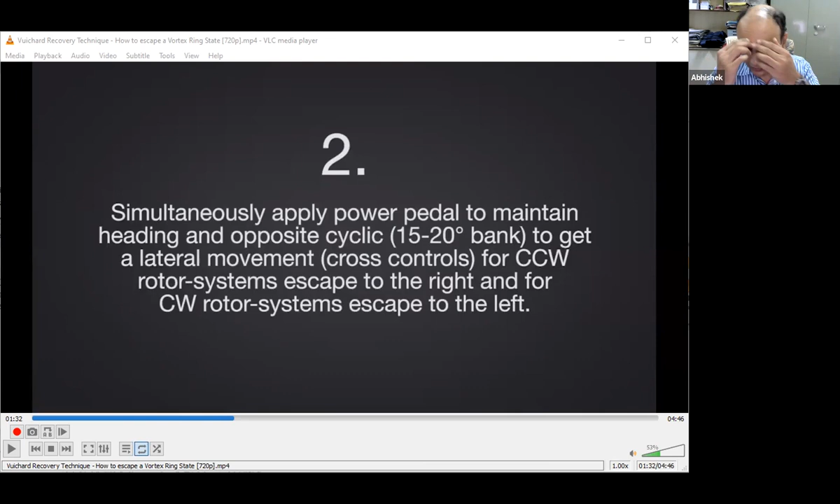So I had a $100 quad rotor long back, which did not have any sophisticated autopilot. It simply had a basic attitude controller, so you are practically flying it manually. In that case, its RPM controller was not very good.

So you would give a small throttle reduction to bring it down. It will start to come down very fast. A few times I would find it to enter vortex ring state. So what happens? When you enter vortex ring state, your vehicle will start descending very fast.

If you start descending too fast, what is going to be the panic action on your part? What will you try to do? Thrust up. Right, so you'll try to increase the thrust.

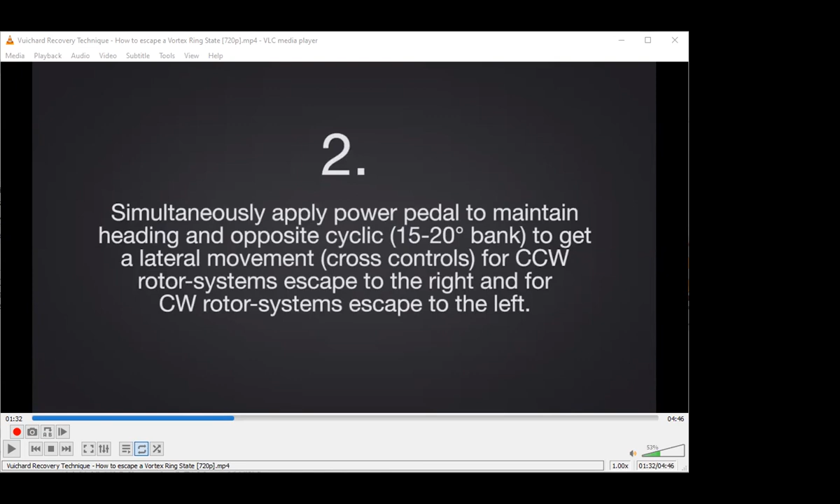Yes, sir. So you'll try to put more power into it. But more power actually makes the situation worse. Because what happens is more power means it will spin at higher RPM. If it's spinning at higher RPM, its downforce is increasing, so your vortex ring state will become worse, and it will not help you much.

So what is recommended is that instead of trying to give more power, you try to go forward or backward or sideways. So I'll try to give some forward pitch angle, so that you start moving forward, and you will see that you will recover control immediately. It will come out of vortex ring state very quickly.

So now, because of this whole business that you are trying to come out of this condition by applying more power, helicopter pilots used to refer to this particular condition as settling with power. Okay, so that's a very common name.

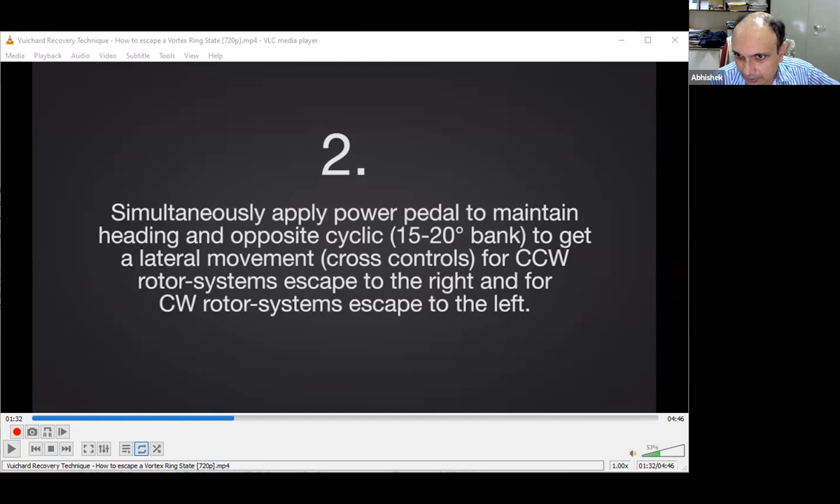So I'll play another video where they mention exactly the same thing. I don't think it's really very useful, but here they use the term settling with power in helicopters. Yes, so this guy tries to explain something, so it's not very relevant.

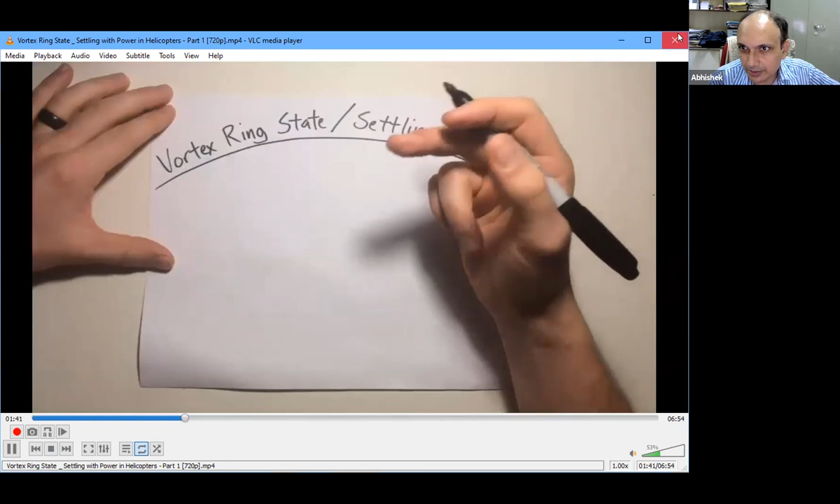Okay, so let's go back to my lecture slides. Let me share it again. So that's why they used to call it settling with power. And the way to come out of this vortex ring state is by maneuvering the helicopter in any other direction, either forward, backward, sideward, something which will help you come out of vortex ring state.

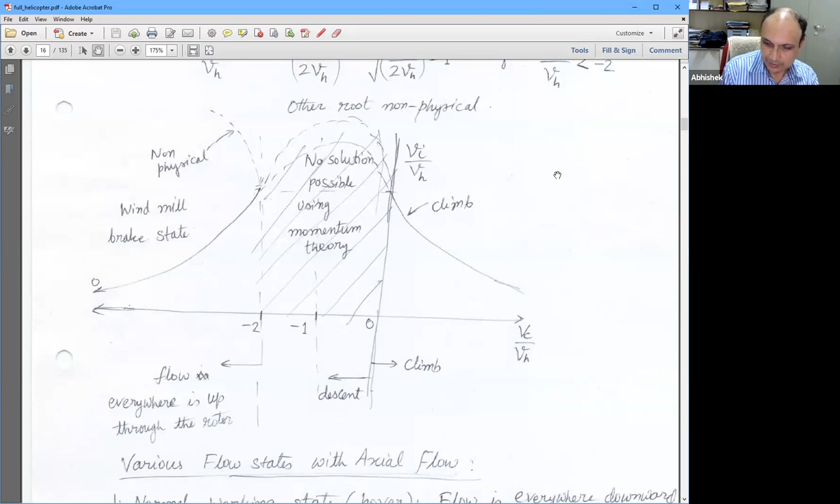So now let us look at this more formally. What are the different working states of a helicopter rotor? So, various flow states with axial flow. One is, of course, the normal working state, which is hover. Flow is downward everywhere. The second situation is vortex ring state.

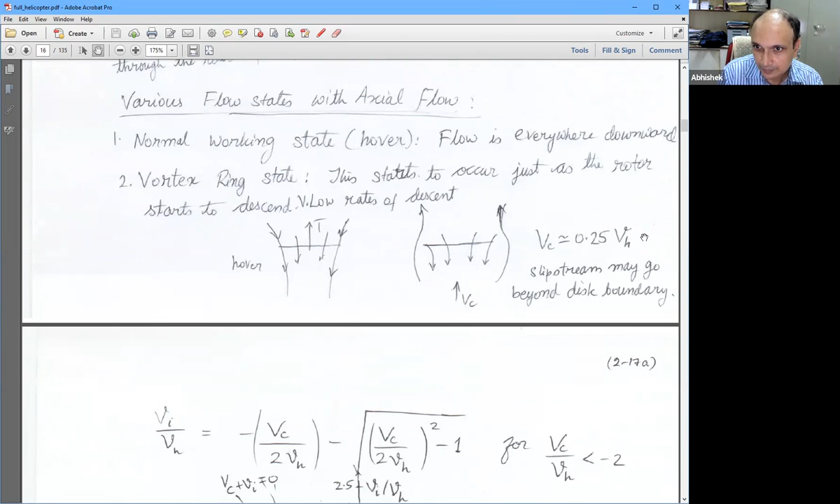It occurs as the rotor starts to descend at low rates of descent. The typical order where you start experiencing vortex ring state is when you are at around quarter of hover induced velocity. In this case, the flow becomes such that the wake will actually go beyond the rotor disc. So you have this kind of bulge because there is a ring of vortex sitting here. So the flow may be somewhere upwards, somewhere downwards, and so on.

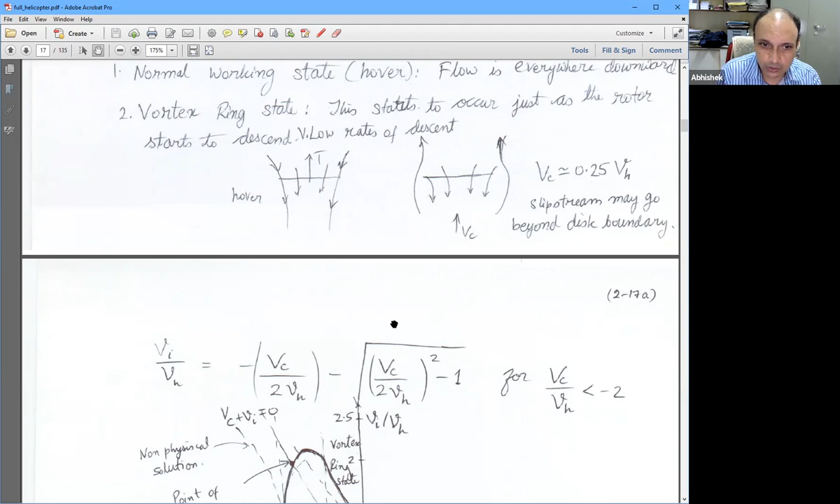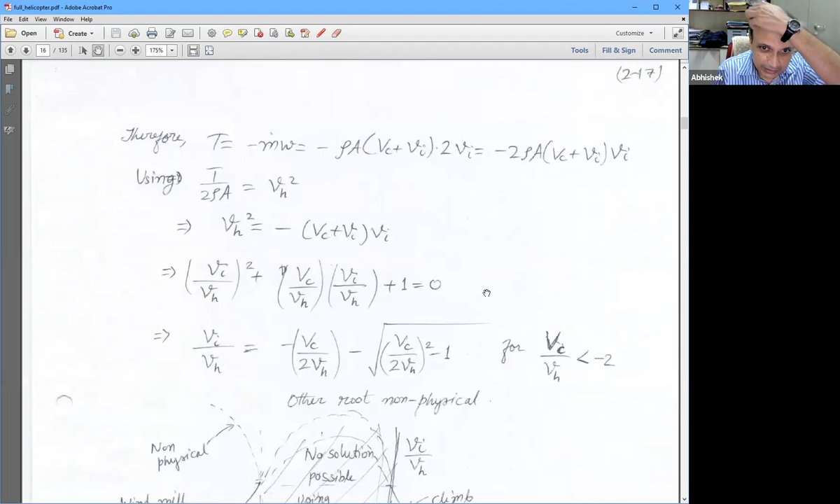Okay, but before we go with details of this, sorry, I forgot to cover one more part. That is, after we get this relationship, we also write the expression for power, which I have not done earlier here. So that actually is to be done. Let us first quickly discuss this part.

So this is the same graph which we saw earlier, that is induced velocity for normal working state, where you are climbing and hovering. Other is for the windmill brake state, when you are descending very fast and the flow is completely upwards. And in between there are other things like vortex ring state, turbulent wake state, and so on, where momentum theory is not valid from 0 to -2.

So same way, I can draw another graph, which is the power graph. Power on one side was going asymptotically towards this line. Other side also, similarly, it will come down asymptotically towards the same line. Here is the windmill brake state. Only difference is that here the power was positive, here the power is negative. So the power actually is in the third quadrant.

This is first quadrant, everything is positive, my climb is positive, power is positive. Other side, when I go to very high descent rates, my descent is very fast and I end up generating power, calling it the windmill brake state. And in between there is power, but we don't know how to calculate that using momentum theory. It has been connected by using some empirical observations. And also in between, there is a point where a crossover happens.

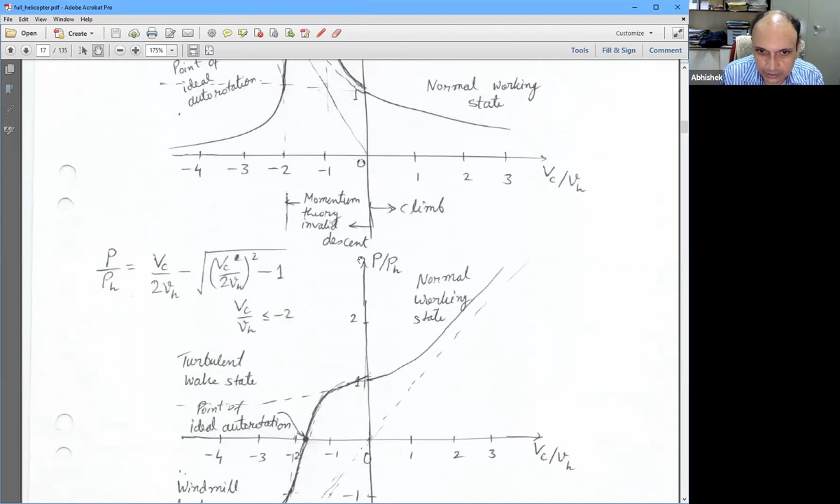So moving on to the power graph, here this becomes more obvious. So you can draw these two lines, power by hover power on the y-axis, climb by induced velocity for hover on the x-axis. Draw this 45 degree line, and then from 1 it goes asymptotic towards that, and here also from -1 it will go asymptotically towards this dashed line.

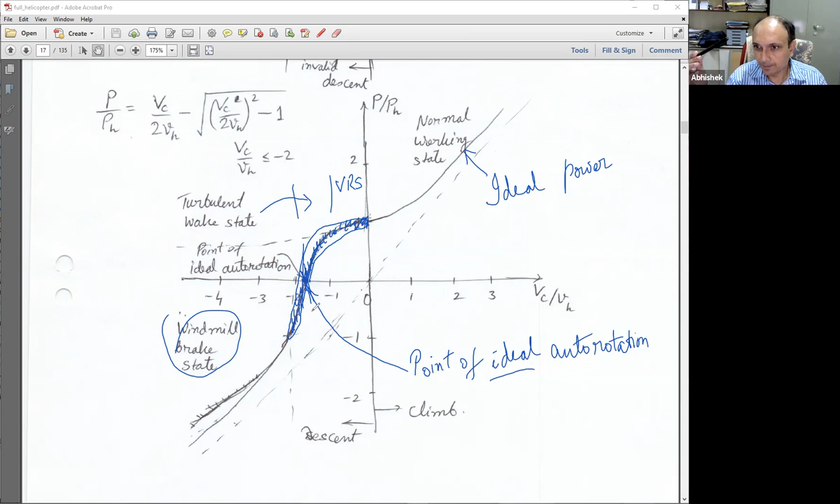So the helicopter starts to descend, right? It's descending, and when it's descending, it's basically losing potential energy. And if I don't do anything, it will gain kinetic energy, right? You drop a stone, its speed increases, right? So like that, the helicopter is dropping, its velocity is going to increase, and as a result, the airflow through the rotor will also increase. So that's how this whole autorotation business works. I will explain it in more detail, but I think that is fine for now.

All right, so we are done with this graph. So this is a point of autorotation where the power required by the rotor is zero.

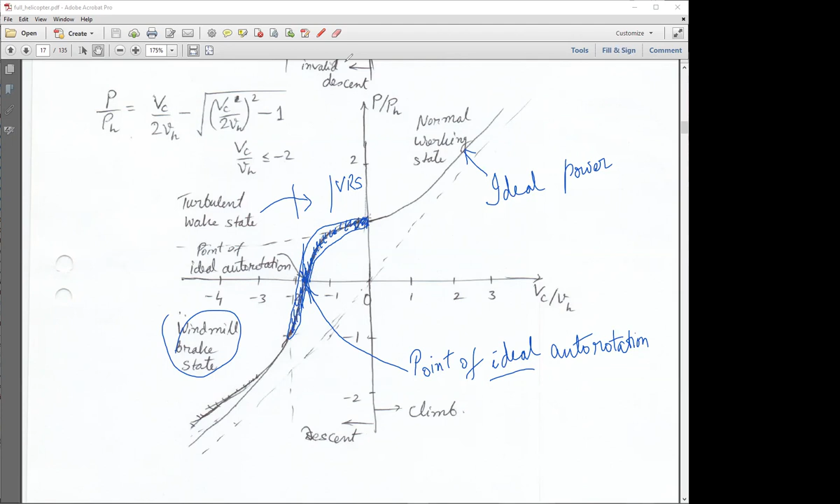Sir, what is turbulent wake state in this? Turbulent wake state is similar to vortex ring state. I'm coming to that in a moment.

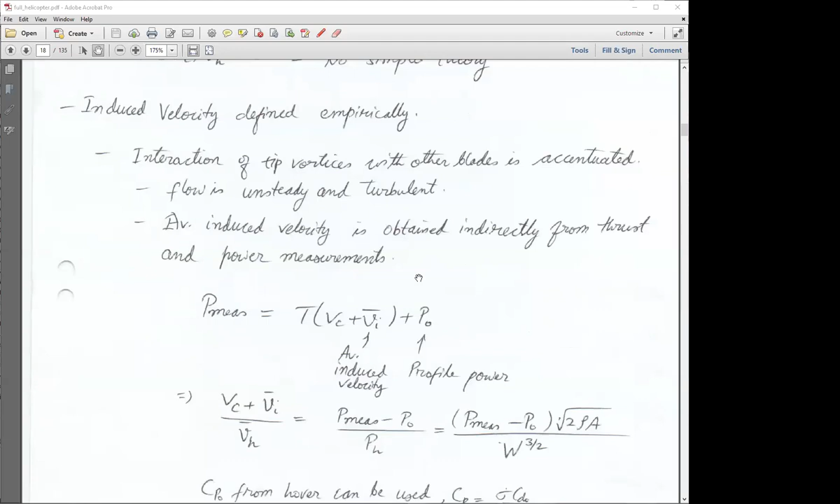All right, so now let us look at these things one by one. Okay, I'll come to this autorotation business and the formula for that later. Okay, first let us look at this here. All right, sorry, one minute, I will call.

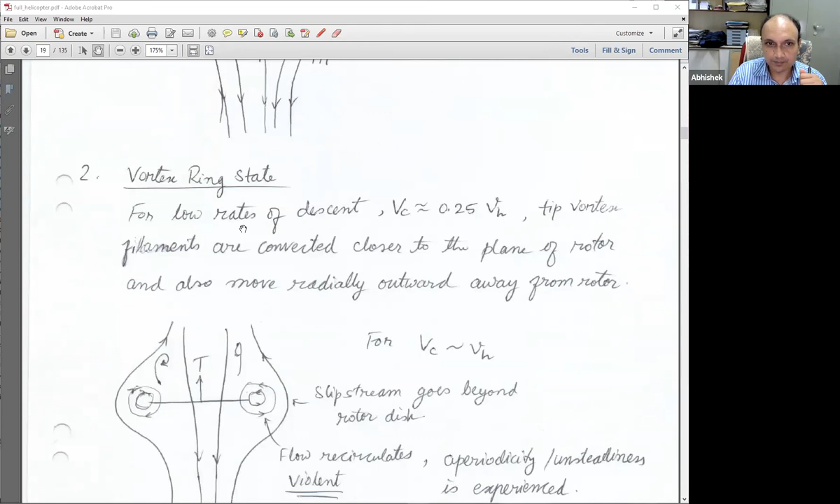All right, so first was what we are talking about - the normal working state. The flow is nice, downwards everywhere, your boundary is well defined. Next state is this vortex ring state. So for normal working state, you can draw this diagram. So write down normal working state in your notes. I forget that you have to take notes also.

So draw this diagram. Write down these four working states of the rotor in axial flight. Remember, this is for axial flight only. What is axial flight? Ascend and descend only. So your rotor, the flow through the rotor is only in one axis - it's parallel to the axis of the rotor, center of the rotor, always parallel to that. Okay, diagram done, normal working state over.

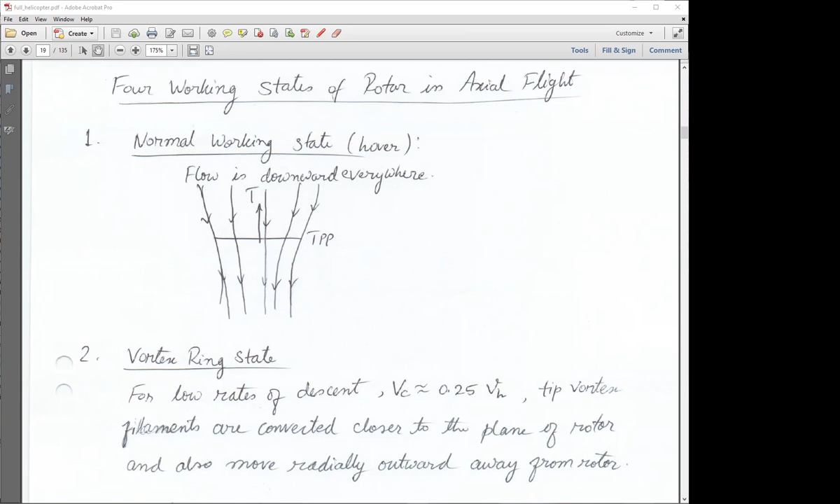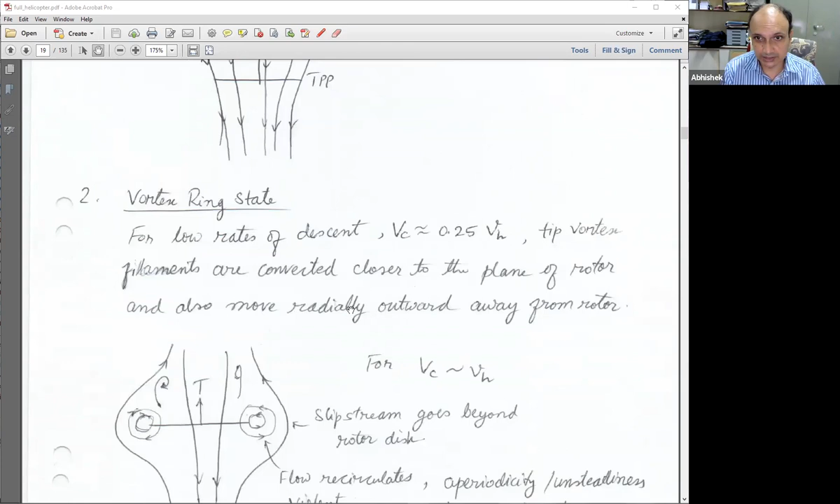So diagram is done, right? Yes, sir. Okay, so that is normal working state. Today is 19th, right? Now the question is, what is vortex ring state? So write down vortex ring state.

For low rate of descent, when descent velocity is of the order of 0.25 of VH, a quarter of VH. So if my VH is say 10 meters per second and my helicopter is descending at 2.5 meters per second, in such scenarios, tip vortex filaments are convected close to the plane of the rotor.

You saw that huge vortex ring created behind the helicopter in that visualization. That kind of ring gets created because the air coming from down, due to my descent, is pushing the wake up. It's pushing it up and all the vortices which are being shed, the helix - if I squeeze the helix and bring it into one point, just imagine, like a spring, I press it, it becomes a coil, right?

So that ring forms around the rotor disc. It's convected close, pushed by the air close to the plane of the rotor, and also moves radially outwards away from the rotor. Because I am pushing it, it needs some space where it can park itself. Close to the rotor there is a lot of spinning air, so it will form an equilibrium point where, if this is my rotor, the ring will be somewhere outside that rotor area. So this ring will form and the flow field around it will bulge up like this, which we saw in the CFD simulation I showed you.

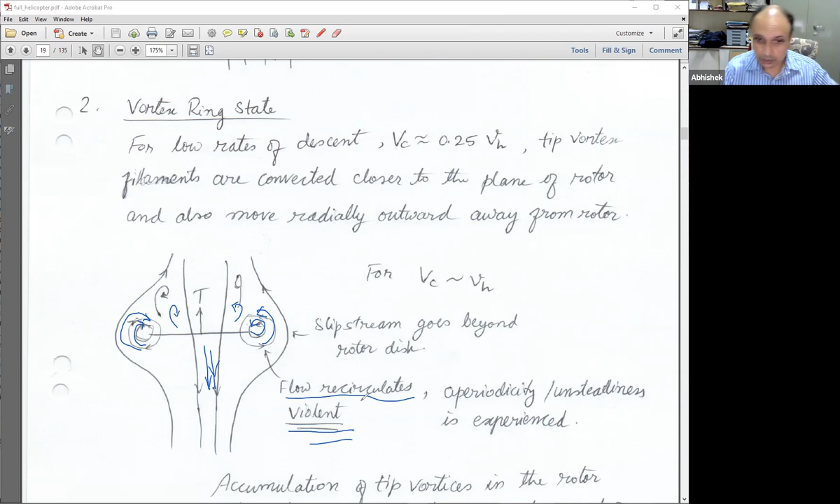So this accumulation of tip vortex in the rotor plane begins to resemble a concentric set of vortex rings.

So from a piloting point of view, this is very dangerous, and the rotor can lose lift as we saw. And that's why that case of the Ospreys - V22 Ospreys crashing. This guy starts descending too fast and somehow first rotor ends up losing thrust faster. And because it loses thrust so fast, now the other rotor is generating thrust. What will happen? No thrust here, lot of thrust here.

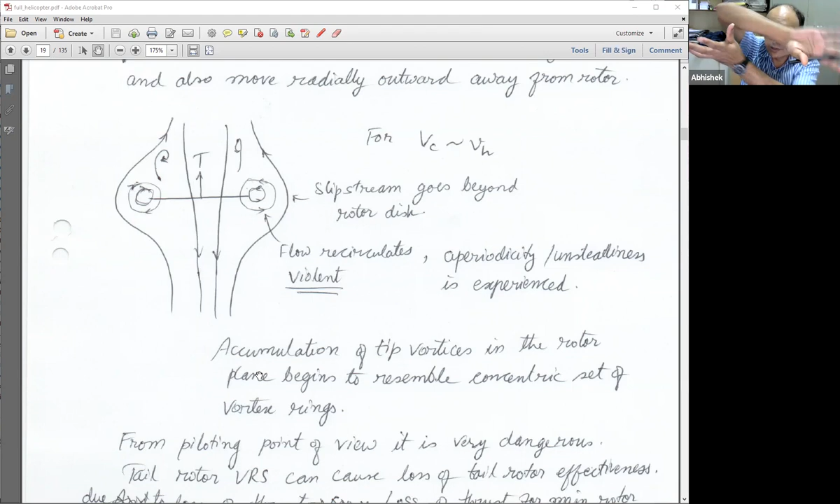Couple rotates, so you have a moment, and the whole thing is going to flip over. That's what you saw in that animation, that the whole helicopter, the Osprey, V22 Osprey, it flipped over, and after it has flipped over by 180 degrees, you cannot do anything. Crash in a matter of time.

So it's very dangerous, but all helicopter pilots are aware of this, so they normally never descend vertically. If they have to descend vertically, they will do it very, very slowly, at order of... here it is safe. I would not want to go over 0.1 VH, because if I go to 0.25 VH, for sure I'll have vortex ring state. That is one part of the challenge.

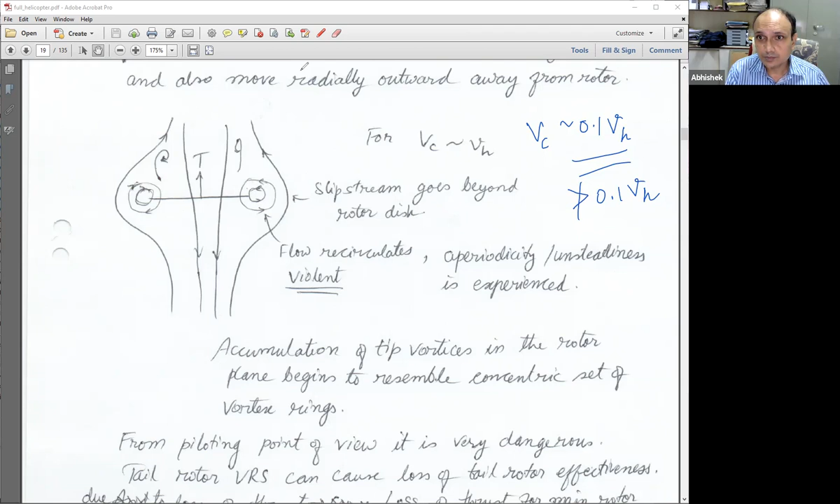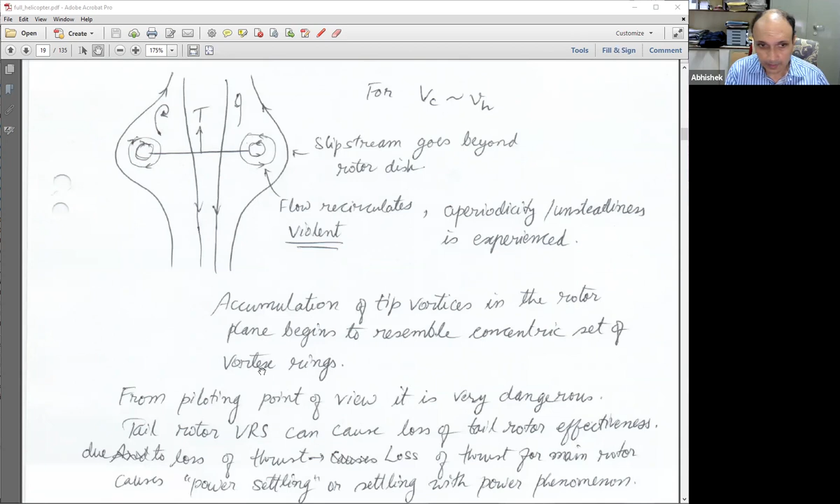So the accumulation of tip vortex happens and resembles this pattern. I hope you are noting down all these things. Yes, sir. So from the pilot's point of view, it is very dangerous, and also the same thing can happen to my tail rotor also.

So tail rotor vortex ring state can cause loss of tail rotor effectiveness due to loss of thrust of the tail rotor. Because, you have to tell me, explain to me - I already gave you one example where there is a scenario in which the tail rotor can enter vortex ring state. What was that?

Let me ask someone, I'll call out names. I don't want the same people answering all the time. Who are the participants, right? Yeah, okay. Aman, are you there? Aman? Yes, sir. Unmute. Yeah.

All right, so I talked about one scenario where the helicopter rotor can enter vortex ring state. Can you tell me about that scenario? Sir, when they were descending very fast - tail rotor. When is the tail rotor descending? What is the tail rotor? Which is behind the main rotor. Yeah, so at how - is it descending? How will it enter a descending condition?

I agree, the rotor has to experience descending condition. So the question is, how would tail rotor experience descending condition? What can happen?

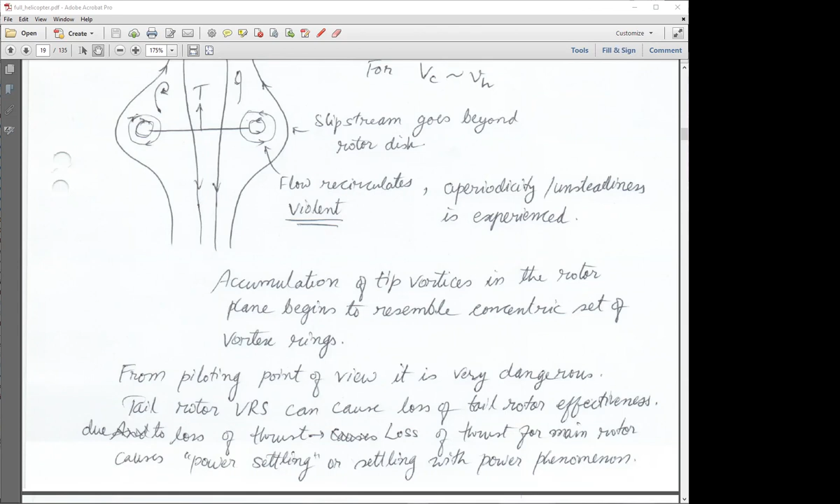All right, so Nikit, we have considered 2 scenarios now. Can you think of a third scenario? So, due to continuous pedaling, we can change the yawing moment, and due to rapid change in yawing moment, this can happen. Right, so if you generate a fast yaw rate, if I make my helicopter yaw very, very fast, that is the third scenario. So if I spin too fast, again my tail rotor can enter into descent condition, and again it can enter vortex ring state. So these three things one has to be careful about.

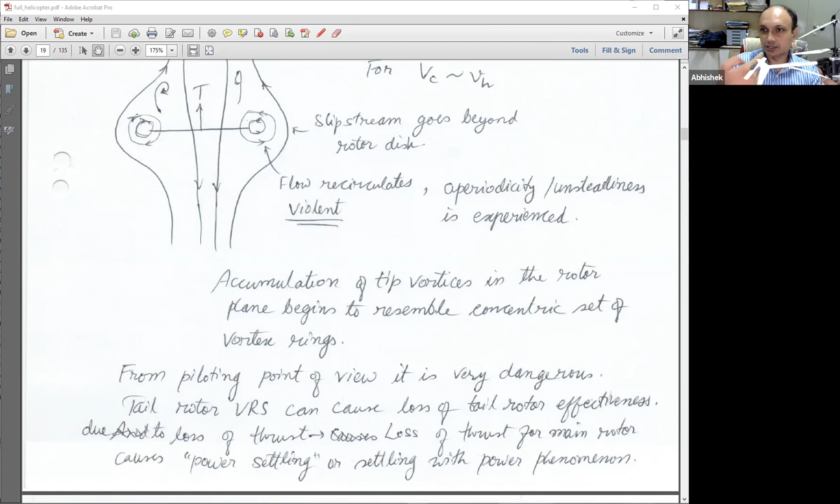Don't fly too fast in the direction opposite to the thrust of the tail rotor. In the sense, if my thrust is in this direction, I can climb, but I cannot descend. So I should not fly in this manner too fast. That would be the direction opposite to which the tail rotor is thrusting. So if the tail rotor is thrusting in this direction, I should not go in the direction opposite to that. It should not go into a descent kind of scenario.

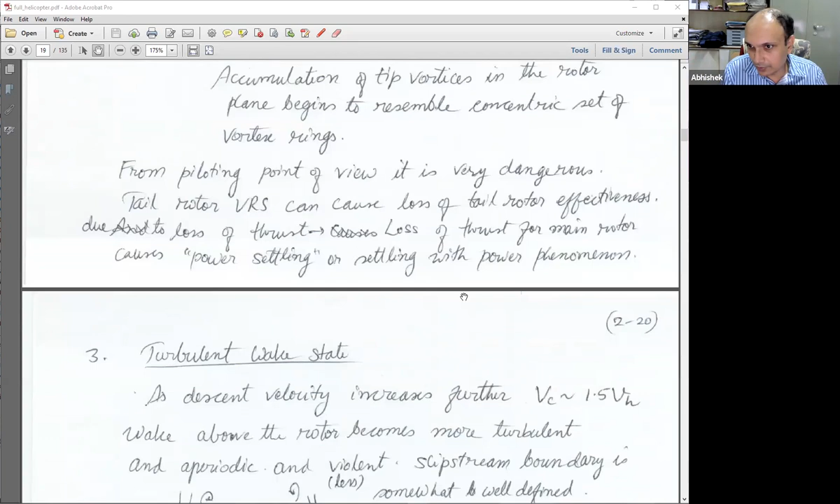So one is sideward speed, high sideward speed. Number two is wind disturbance, and number three is very high yaw rates. So in either of these three scenarios, we can get into trouble of this kind, where my helicopter can enter vortex ring state. So this is actually a very interesting area. Still, a lot of people do research in this domain. Now we covered this part really well, so let's move on further.

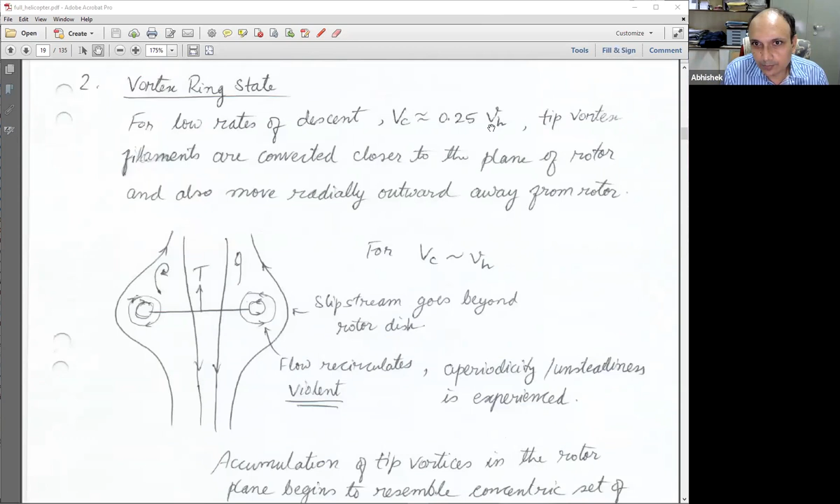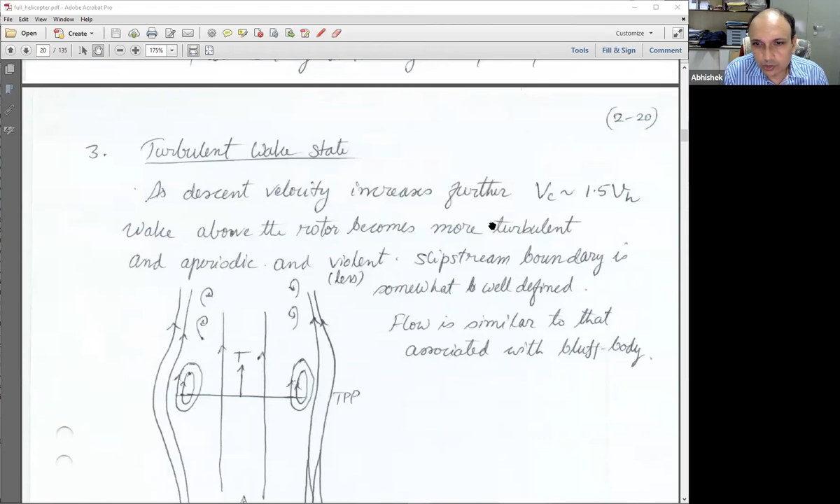So now, if my rotor is descending even faster than this, more than 0.25 or more than VH actually, as descent velocity increases further, so that descent velocity is of the order of 1.5 VH. Wake above the rotor becomes more turbulent, aperiodic and violent. So now the diagram for turbulent wake state is somewhat similar to the diagram for vortex ring state.

So this is somewhat similar, but you can see earlier for vortex ring state, the bulges were bigger. So this is my rotor, and the rings were big, so it was like this. But now these rings have become somewhat smaller, and above there is more turbulence. There is still a lot of turbulence, more or less the flow is upwards everywhere, but there is still a lot of circulation happening. The slipstream boundary is somewhat well defined, so this bulge has come down compared to vortex ring state.

And here the flow is sort of like that with a bluff body. So instead of rotor, what is a bluff body? Give me an example of bluff. Let me ask. Okay, so Sagar, give me an example of a bluff body.

Hello. Hello, yes, Sagar, go ahead. Yes, the aircraft nose maybe. Aircraft nose? Yes, nose is a bluff body. Well, not entirely, I mean I can make it pointed and nice and streamlined also. Give me a more common example of a bluff body. Any normal shape which you see around you, which you can call a bluff body. Yes, sir.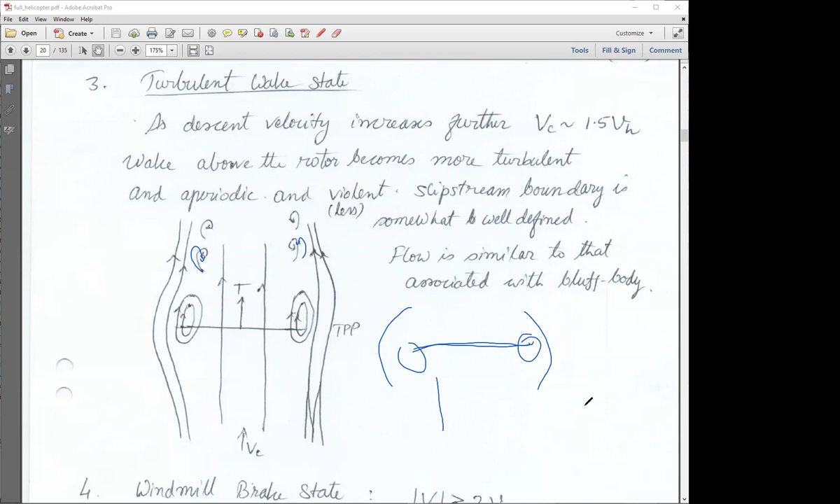All right, so Guru, what are you saying? Sphere, cylinder. Sphere, exactly, sphere, cylinder. I was about to make a square or a cube. So in 3D it will be a cube, in 2D it is a square.

So that's a bluff body. So my rotor actually acts like a bluff body. If I look at a flow past a square like this, then you will see the flow will be... actually, not so much. It will probably be like this. It will go here. Sorry, the flow will come like this, go here, and then like that. I'm not drawing it very well, let me erase some parts. Then probably I can do slightly better. Right, so the flow actually mimics that.

So it can be, yeah, like that. Here there will be a lot of separation. So what happens is flow from here will separate, and you will have this kind of vortical structures being set up. So most bluff bodies, even for a sphere, if you take care, flow will be like this. It will go here and then it will separate from here, and you will have these vortical things coming up.

So in this case, that's what is happening: the rotor acts like a bluff body, and the flow is very similar to that. So this is called the turbulent wake state. The flow behind a bluff body is also very turbulent, and the wake is turbulent behind it, so that's why they probably call it the turbulent wake state. It's similar to vortex ring state, but less violent, I would say. Vortex ring state is more violent.

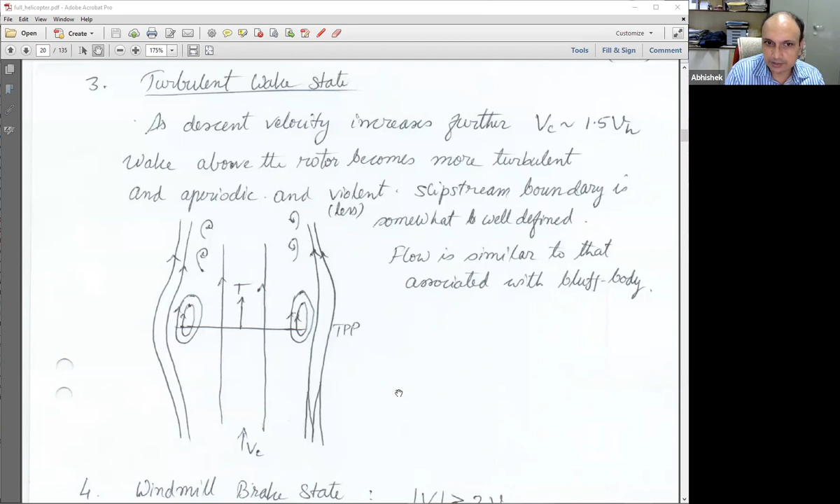Yes sir. Okay, then comes the windmill brake state, when my mod VC is greater than twice of VH, which we have already studied using momentum theory. Again, the regular shape for the slipstream has been restored. We now have a nicely developed slipstream, flow everywhere is upwards. Tip vortex is also now normally getting set up like this. So if I look at it, my helical tip vortices will go like this, like this, it will go up again like this. Really bad drawing, but I hope you get the point.

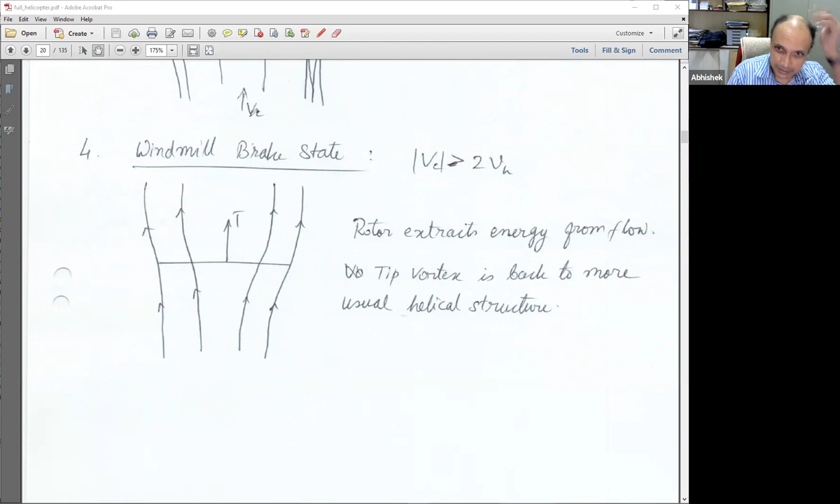Okay, so that was the turbulent wake, windmill brake state. So these are the four states of the rotor, and this happens in axial flight.

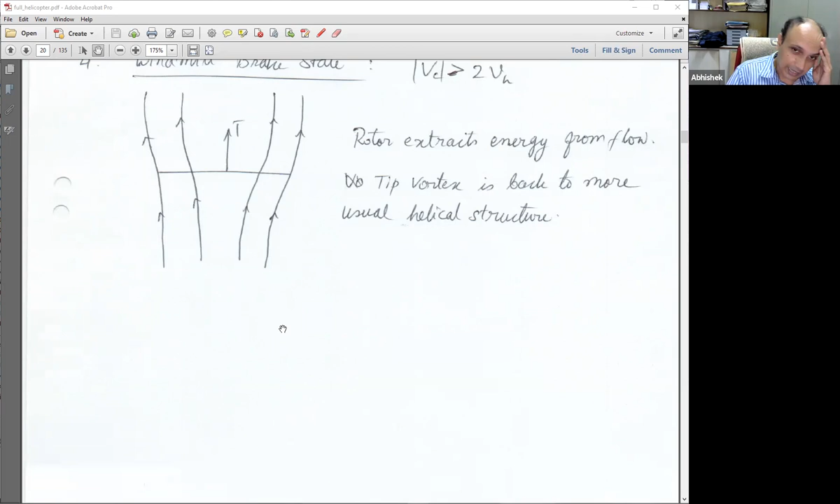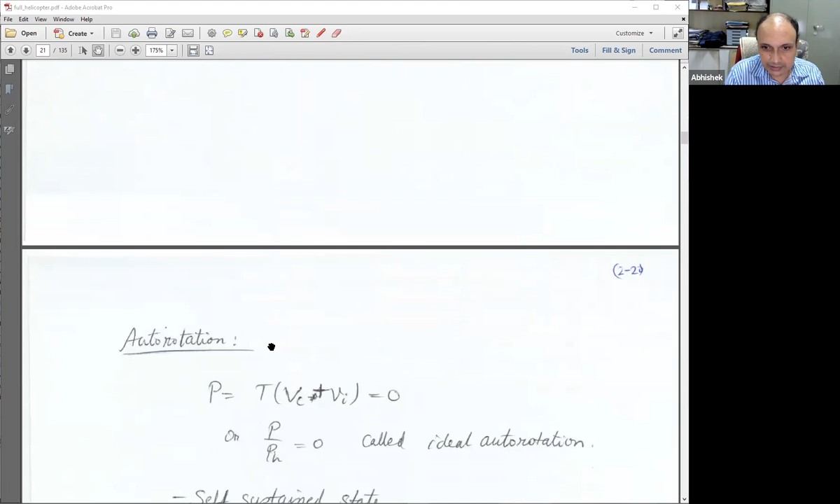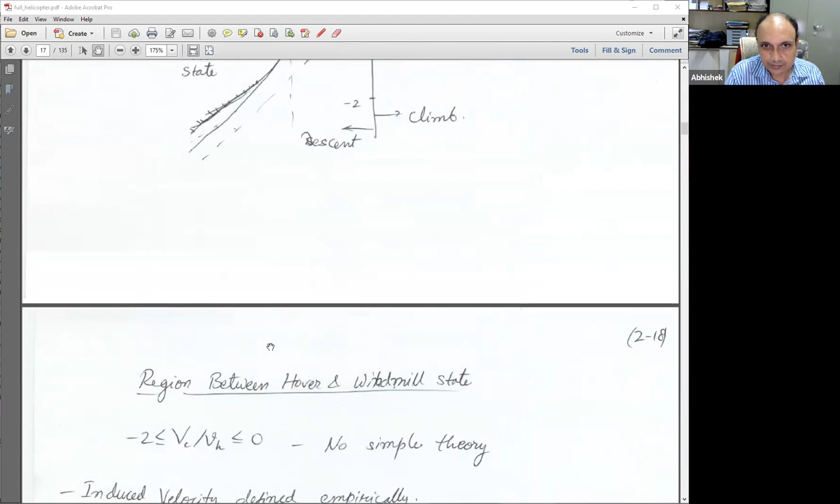Now we have two things to look at. One is auto rotation, and the second is how we define the inflow in between the zone VC to 2VH. So region between hover and the windmill brake state, that is what happens to the induced velocity in between this zone. So like we discussed, there is no simple theory.

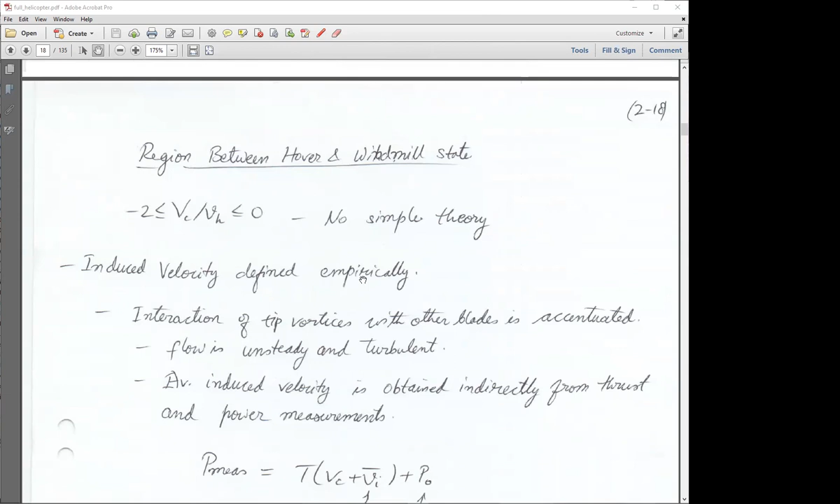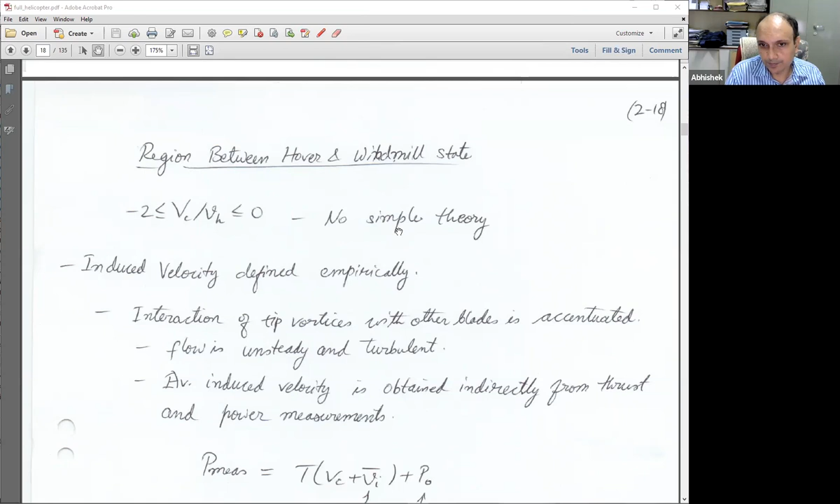So what people do is they try to find out the induced velocity that is there between these two scenarios, and it is done empirically, that is by experimental means. So in this whole region, there are challenges. There is a lot of interaction of tip vortices with other blades, and flow is very unsteady and turbulent. So it is hard to define one uniform inflow, because in momentum theory, the fundamental thing is that the inflow across the rotor is constant everywhere, right?

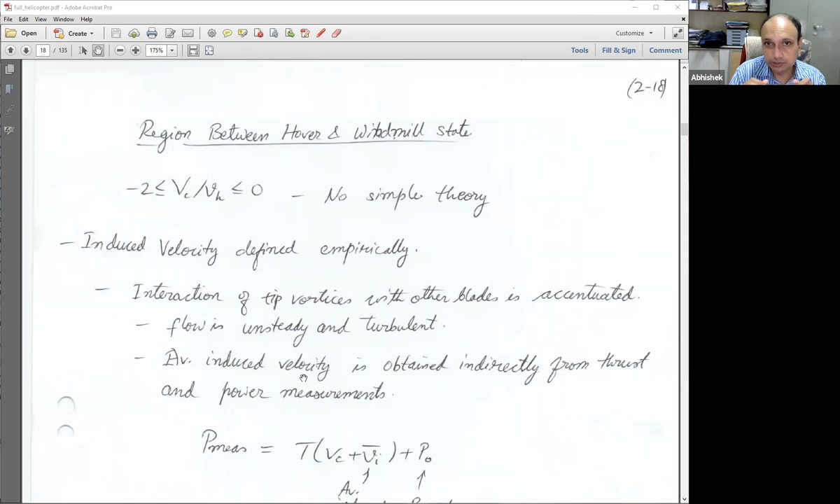Because it's a disk, and everywhere it imparts the same amount of velocity. But in vortex ring state, we see that the flow somewhere is up, somewhere is down. There is a lot of recirculation, so I cannot claim that the same inflow velocity is imparted everywhere. It is not possible. So what do we do? We now define an average parameter. So we say, okay, what I do is I actually take a rotor.

Okay, instrument this rotor and make measurements. So what I can do is measure the power. From momentum theory, I know that my power is defined as thrust into VC plus average VI, with the bars on top meaning average induced velocity.

So whatever power I can measure for this rotor, which is in this descent condition, how do I make a rotor descend for my experiment? Let me ask Srikar, Sai Srikar.

So I want to measure power for this rotor in descending flight. First, you tell me how can I make my rotor descend? I give you this helicopter and I tell you I want to make measurements on this, I want to make it descend. What will you do?

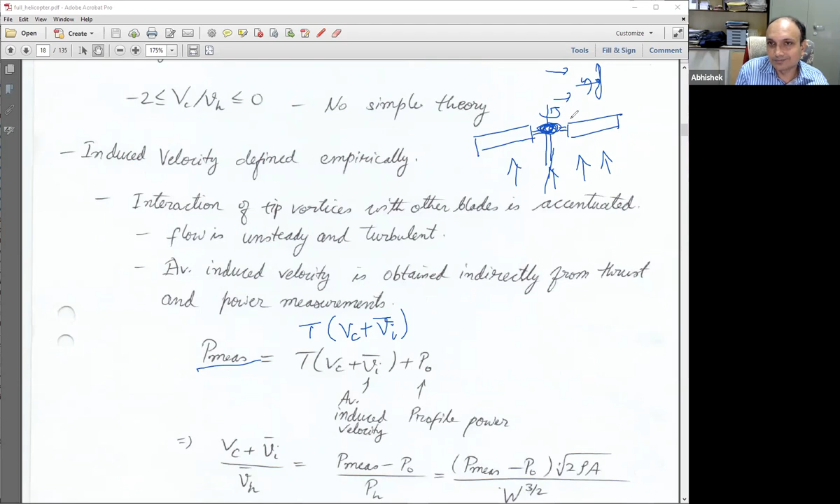So good, now we have put this and turned the wind tunnel on. So there is some air coming from bottom, which is making a descent. So this is like a wind tunnel. The other way, I can put this propeller like this, it is spinning, and my air may be coming from this side in a wind tunnel. So either way, now I'll clear all this.

So okay, fine, I put my rotor in descent. What I want to do is measure this power. So does anybody know how we can measure power for a helicopter rotor in experiment?

Using a load cell. Right, good point. So what do you measure from a load cell? Thrust, mainly thrust in X, Y, and Z directions. Yeah, but thrust will not help me get the power, right? We know the RPM of the rotor, and we just have to multiply with the thrust. No, RPM into thrust will not give you power.

So you're right, you're right, I mean we'll use a load cell, but load cell can measure more things than thrust. Sachin, you want to say something? Sir, we can do torque into omega. Right, so we can measure torque also using this load cell. So you are right, Aman, that we'll use load cell, but load cells can measure 3 forces, 3 moments if you want, with a good load cell, a 6-component load cell.

Or I can simply use a torque sensor, which will just measure torque, a 1-dimensional load cell basically. Yeah, which is single axis, which will be what do you call it, tachometer, right? Yeah, which measures torque. So all right, we measure torque, fine, and multiply with omega. How do I measure omega now?

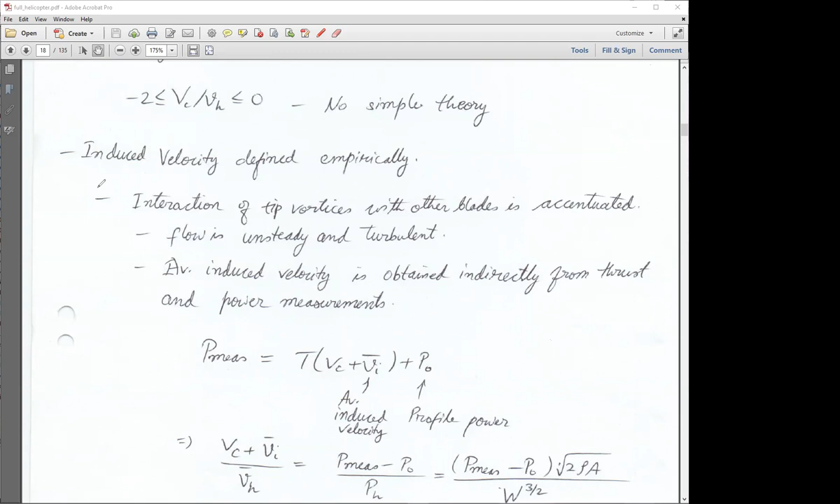Like a Hall sensor? The Hall sensor, exactly, absolutely correct, yes. So Hall's effect sensor is a very common, very cheap sensor. You can buy it for 40-50 rupees with 2 magnets. You can measure RPM of any device very, very accurately. But of course, you require a small electronic circuit like maybe an Arduino board. So you can write a small code in Arduino which can actually count the pulses that the Hall effect sensor will generate every time it passes across a magnetic field. So you put two magnets in the spinning frame, whatever is spinning, and one Hall effect sensor below that spinning frame, and you can measure this RPM. You get RPM, you get omega, you get torque into omega, you get power.

Okay, so that becomes your aerodynamic power. That's what people did actually. They put up an experiment like this. They measured this power, and they said, okay, let me write this power as thrust multiplied with the simple momentum theory formula, plus there is some power which is profile power.

So if I'm only interested in finding out ideal condition things, then I will ignore profile power. I can measure thrust too, same load cell, 6 component if I have, I can measure thrust, I can measure RPM, so I can measure power also.

But for profile power, let's say I have already a formula for profile power for hovering rotor, and I approximate it to be the same. So profile power is, remember the formula, sigma CD naught by 8, which is non-dimensional, into omega r whole cube, into rho, into A. If I calculate this whole thing, I get the profile power. So I know profile power approximately.

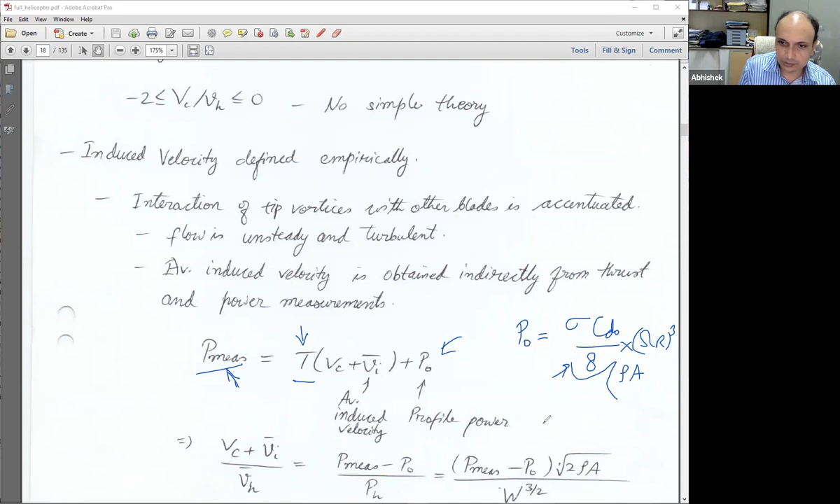So now I reorganize this whole business, and I end up with an expression like this: VC plus VI bar by VH equal to measured power minus profile power, by your hover power. So you get a simpler formula like this at the end.

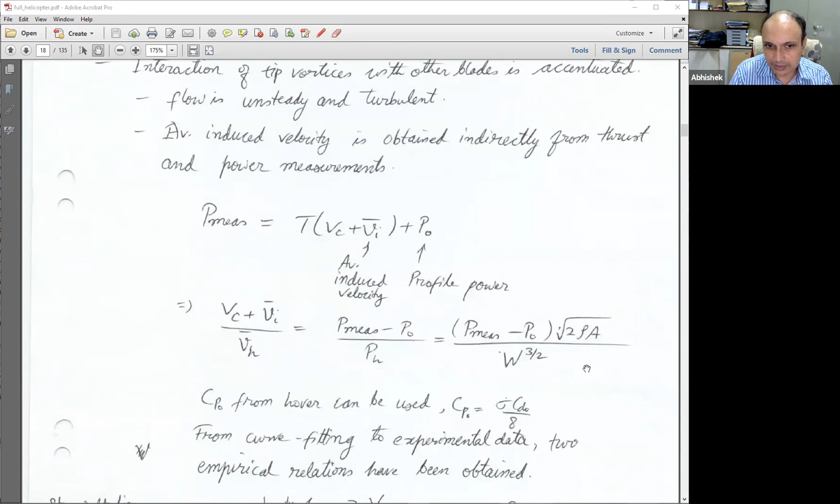So now what happens? I know my VC, because I know my wind tunnel speed. I have turned the wind tunnel on and I can put an anemometer in that tunnel, so I will know the tunnel speed, so I will know VC. I can measure power, I can estimate induced profile power, and I know my ideal hover power, which will be T to the 3 by 2.

For the measured thrust, because I can measure this thrust T also, by this kind of jugglery I can actually find out this average induced velocity. And that's what people did, and that is how they obtained that graph.

So if I look at the induced velocity graph, my graph actually went like this on one side, and on the other side it starts from here and goes like this. So we got this kind of thing where this is VI by VH, and on this side we have VC by VH. This graph came, but by doing this kind of measurement, I can mark out some points on this, experimentally make some measurements. That's what people did, and many people did measurements, and because there will be uncertainty, you end up getting a band of this induced velocity in this region.

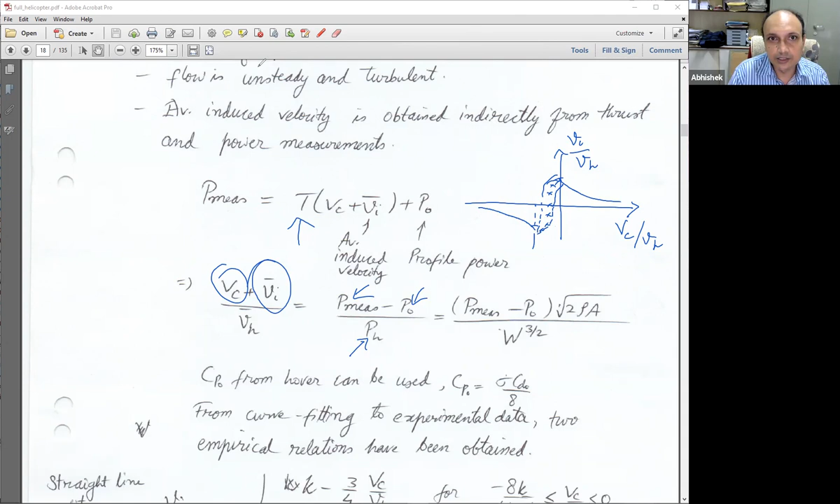And based on this empirical evidence of what they measured, people gave some simplified theory, and that's what we'll see here. So two different theories were given. One is linear fit, so not theory, actually two different empirical models were proposed. There could be many more, I can do all kinds of curve fit. So take this down carefully.

So alright, we ignored things up to here, we have discussed already. So now, whatever results people got, they did two different fits. One is straight line fit, where they use two straight lines to approximate the average inflow. Remember, this is average inflow, not what you normally get.

So one is VI by VH equal to kappa minus 3 by 4, VC over VH. This is valid between minus 8 kappa by 4 kappa plus 1. What is kappa? Same as what we defined in the figure of merit definition, this is induced power factor. So kappa is the measured induced power factor, which we normally use as 1.15, often kappa is 1.15.

So that is my kappa, and with this kappa up to this value, we use this formula. Then from -2 Vc by Vh less than -8 kappa by 4 kappa plus 1, up to that point we use this expression, and Vh is the same, hover induced velocity. So now with this I can get the ratio of Vi by Vh.

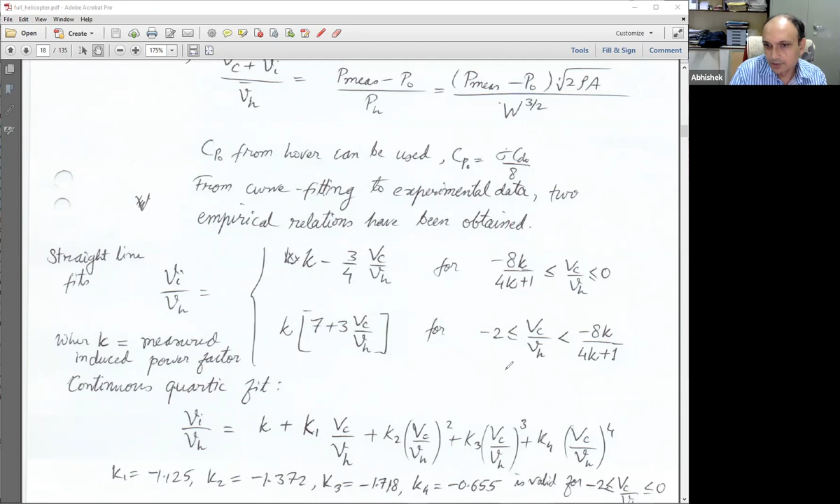So that completes the definition of induced velocity, how you calculate this in the region where momentum theory cannot be applied. This is only an approximation, used in extreme scenarios where you have to get some calculation going and there is no other option. So this is the definition or expression. Have you all noted this down?

Just a second. Sure. Okay, note it down, then let me know. Anyhow, this is the last thing we want to cover, and time is more or less up.

Sir, I have a question: how can we reduce that vortex ring state, the turbulent wake state? Can we reduce it by changing the shape of the rotor blade? Nothing can be done actually. I don't think anything can be done, but yes, it could be an area of research where you can explore and see whether certain design changes in the rotor can help you mitigate vortex ring state. People have talked about that, but the key thing is that normally vortex ring state is easily avoidable, so why worry so much?

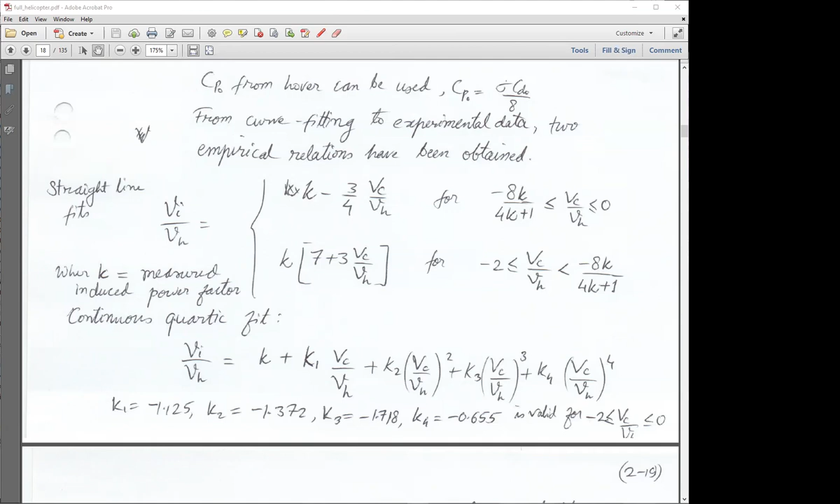So what is the easiest way to avoid vortex ring state? By changing the tail rotor? No. Why tail rotor? Vortex ring state can happen to the main rotor also, right? So what is the easiest way to avoid that? See, tail rotor vortex ring state, if it happens momentarily because of wind or side speed, you can immediately change that. It will only make you yaw once, and after you have yawed, you can control it with some ease. It can be troublesome, but it is still possible to control if you have enough space.

Main rotor vortex ring state can happen when you are descending very fast vertically. So I simply decide not to descend vertically. If I have to land somewhere, I'll come down at an angle and land, no problem. No chance of vortex ring state.

But what about VTOL, sir, where landing is direct? VTOL airplanes are also the same thing. Like you saw for Osprey, or even for our vehicle, we have a biplane tail sitter in our lab. Back transition, go to hover, and in the autopilot we have set it so that my rate of descent would never exceed 0.1 times what my hover induced velocity is.

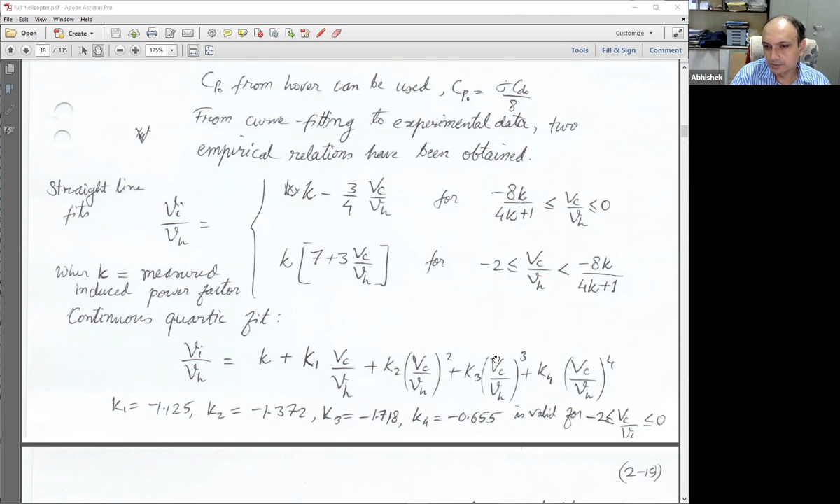So we have kind of hard-coded that in the autopilot, and the same is there if you buy a DJI Phantom or any other drone—they have hard-coded this too. So even as a pilot, you cannot exceed the vertical rate of descent beyond the safe limit. There is no option, you have to descend vertically, especially for VTOL vehicles. But then I only have to travel a small distance using that—I'll approach like this and do a back transition at low height, then land.

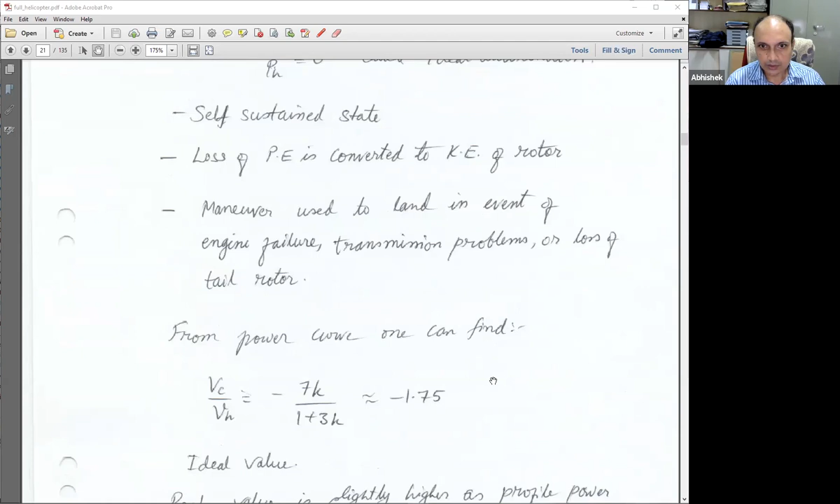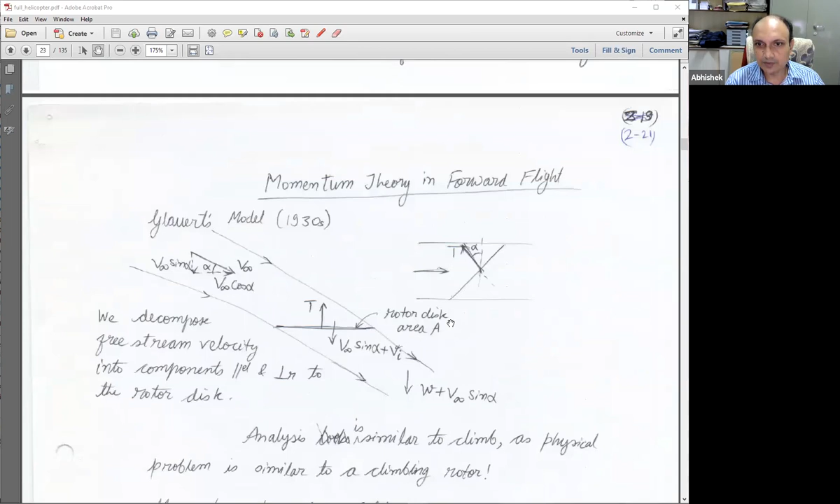So that's done, right? I think we are done with this whole business. Now I'll talk about auto rotation a little bit next class, explain what auto rotation is, and do the basic derivation. Simple things, then we'll start with forward flight. So I'll wrap up auto rotation next class, and then start with the forward flight condition. Any other questions?